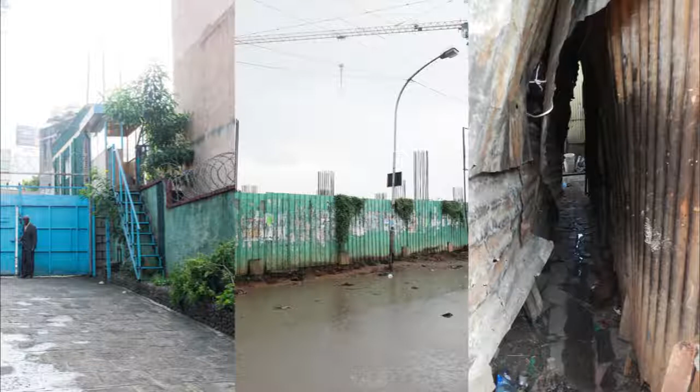people living in them. Besides more developed contexts like New York and Brussels, Merkato and Addis Ababa are part of a bigger focus on understanding developing contexts. Within Addis Ababa, the political center of Africa and a city of more than 3 million inhabitants, Merkato employs around 13,000 people in one of the largest open markets in Africa. In order to read the structures and complexities that come with this scale, clear parameters and methodologies structure the research.

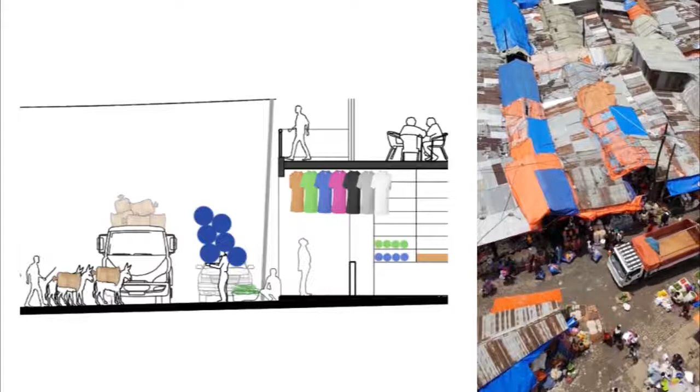The first stage of fieldwork focused on 3 major themes: motion, edges, program. The 3 themes served to pinpoint a specific situation for collectivity and defined areas within Merkato that displayed potentials and challenges. Edges. Edges were studied by means of porosity, axis, and massing. Different configurations and uses were analyzed to have an understanding of the workings of boundaries within the market.

Challenges that arose were the limitations of access that occur when shops or other activities extend their business to the street, and limiting porosity that results in newly established main corridors. Potentials include activation and appropriation of edges, which are created by a difference in configuration, typology, or floor material.

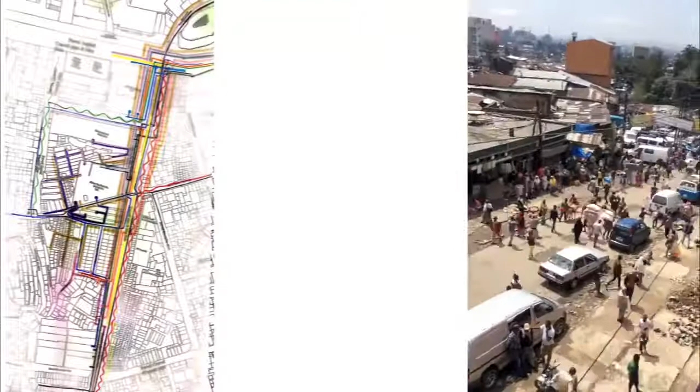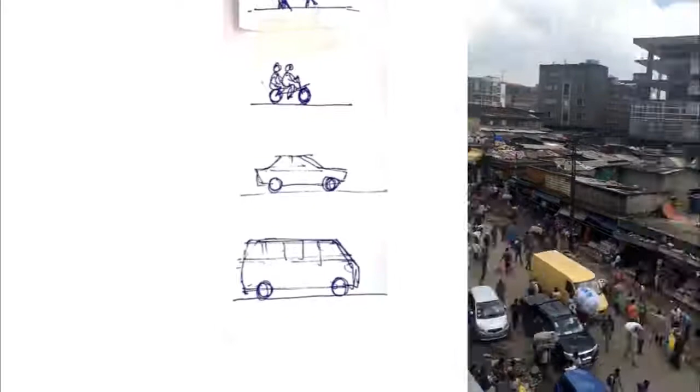Motion. Motions of all kinds were mapped to understand movements of every actor in Merkato and its impacts on architecture and infrastructure. The main challenge found here is the concentration of activities in the Minalesh Tera, where the chain of production, storage, and sales are in one place. The contrast lies within the more recent mall area nearby, where these units are decentralized. A potential is translating horizontal activities, such as the production chain, to a vertical typology, such as the nearby mall.

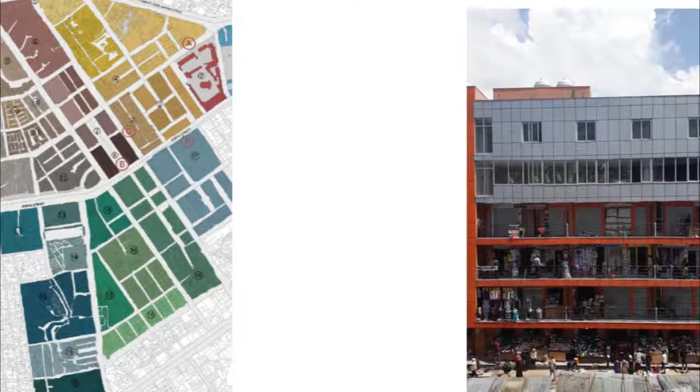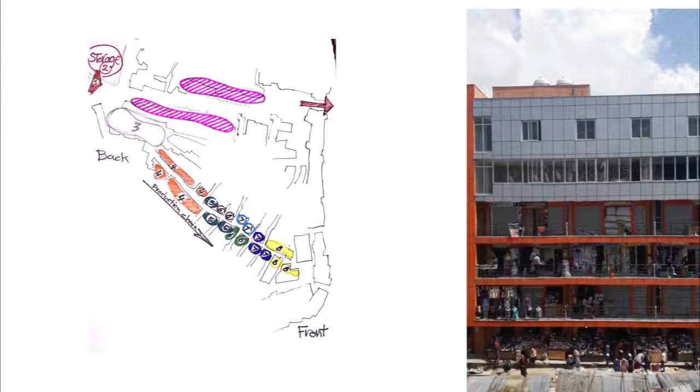Program. Goods sold in Merkato are traditionally grouped in defined terras. It still allows for intermediate spaces where programs are flexible, interchangeable, and overlapping. Malls challenge the existing fabric by disrupting groups of similar, interdependent activities within a single terra, which causes inefficient logistics and difficulties in attracting customers. Both typologies of mall and smaller scale shops show potential in the multiplicity of activities that are all interdependent.

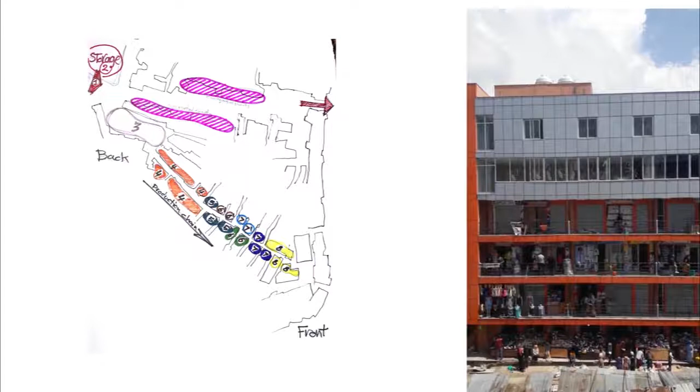The 3 themes serve to pinpoint a specific situation for collectivity and define areas within Merkato that display potentials and challenges. After reading the situation on site and identifying potentials and challenges, we started developing strategies for a sustainable development of Merkato. The strategies are divided in 6 themes: program, building, infrastructure, mobility, access, services.

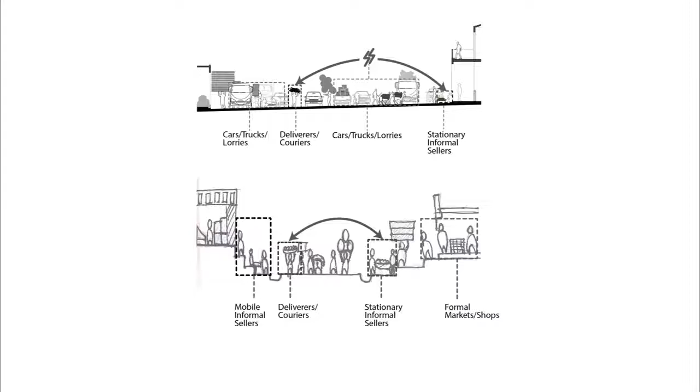Program. Within the program, everyone should be welcome. We see maintaining the presence of different actors of Merkato as a potential for the different markets on the street. A proper additional storage floor can save area on the ground floor, which can be used to expand businesses. A building could be organized around the Merkato process. The inner part could be used for production and storage, while the final products could be displayed on the most visible areas on the main street.

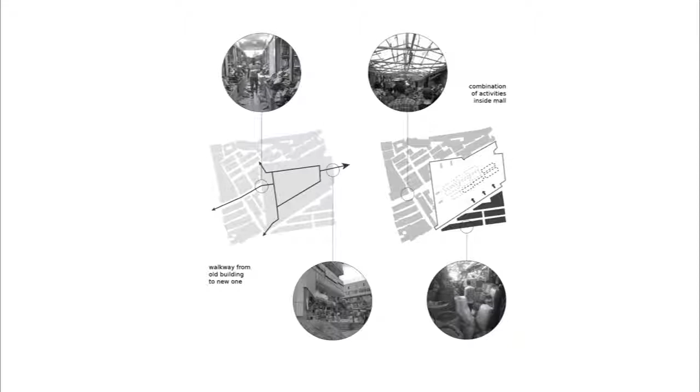A new mall and the surrounding tera can help each other. The surrounding teras can continue through the ground floor of the mall. This way, the mall can attract people to the tera. If there are different types of labor and services grouped together, keeping them close to each other increases productivity and efficiency.

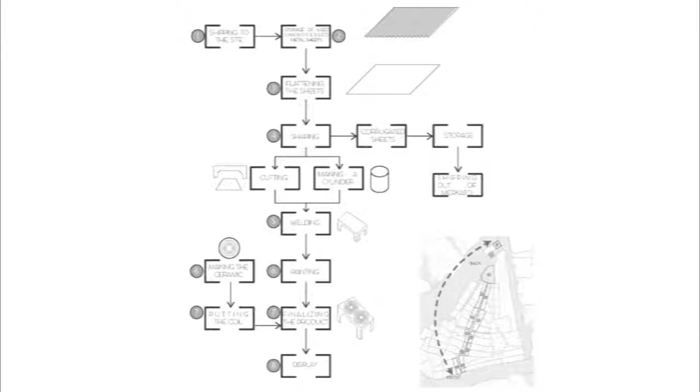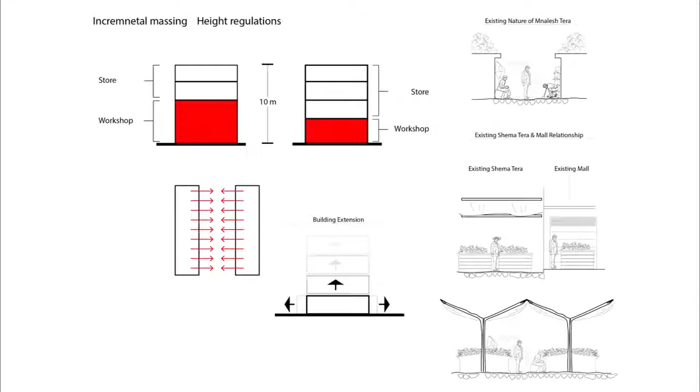Different materials, where to pave or not, placing steps and water drainage, would influence the activities taking place on the sidewalks. Building. Entrances of the mall should be placed according to the existing street so that existing streets continue into the mall. Even if malls have one front facade, the others are just as important.

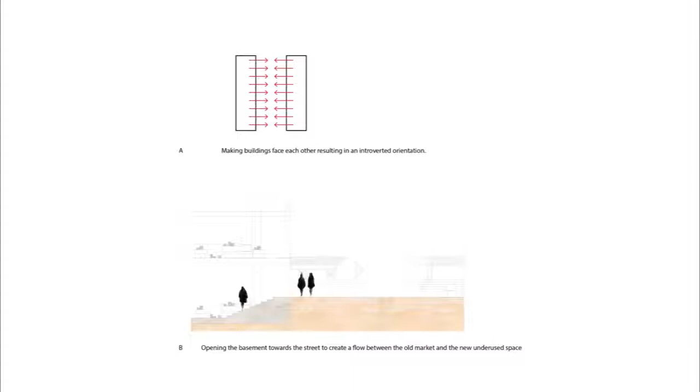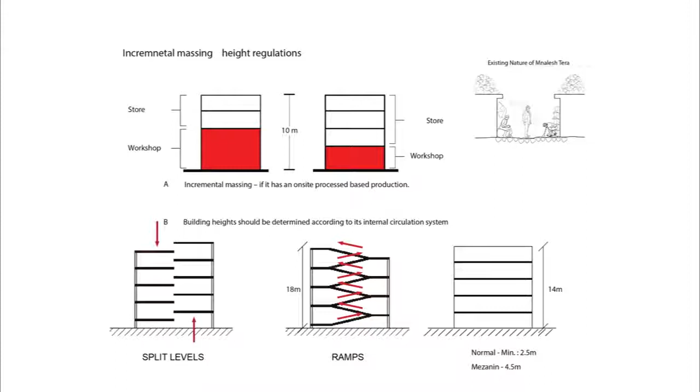Spaces between the malls can be used for informal structures, so access should be provided from all sides through the staircase and ramps. Different functions need different floor heights. Workshops, for example, need high ceilings. Split levels and ramps should be considered to improve circulation in the malls. Working spaces inside a mall or a productive tera should be accessible from a different side than the customer accesses.

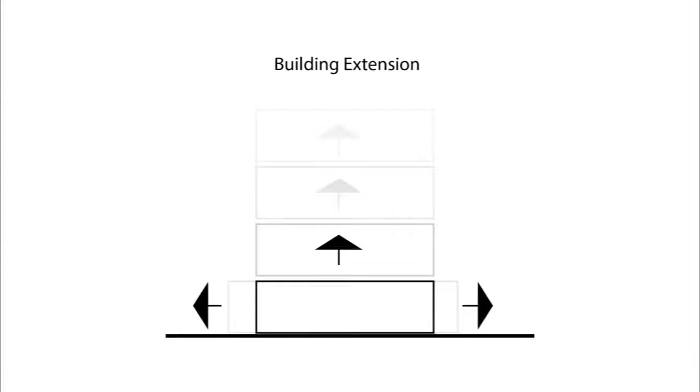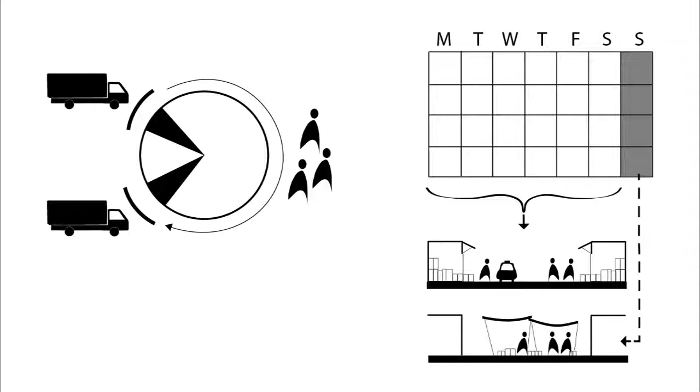A building is not going to last forever. We should consider making informal expansions possible. Access. Limiting the deliveries of goods to the shops to the early morning and evening will keep the trucks out of the streets and make movements easier during the day.

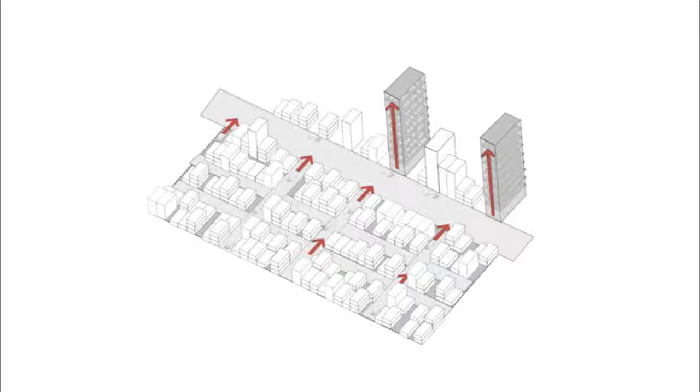To prevent congestion and provide more area for activities within the market, parking should be located in designated zones or buildings outside the market area. Loading and unloading areas for goods and drop-off zones for public transport should be specified. Shops do not finish at the entrance. A better connection between the internal and external spaces would lead to increased access and usage.

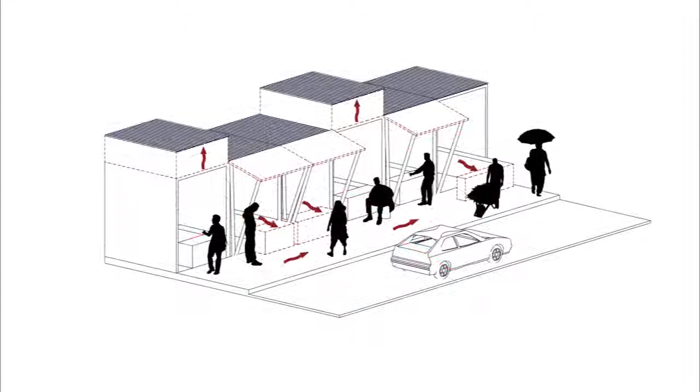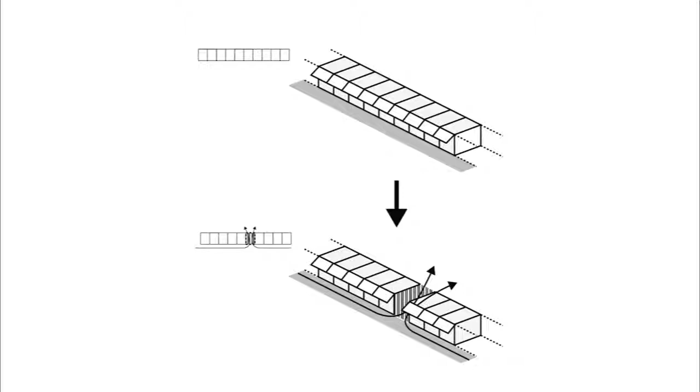The streets can be designed to allow for shops to extend outwards as long as they do not limit the circulation too much. Gaps will improve access and visibility for shops that are not located on the street. Connecting the malls with bridges will improve connectivity and reduce the need for vertical movement.

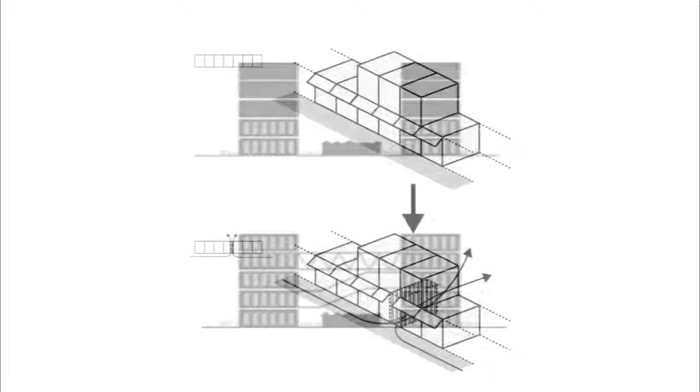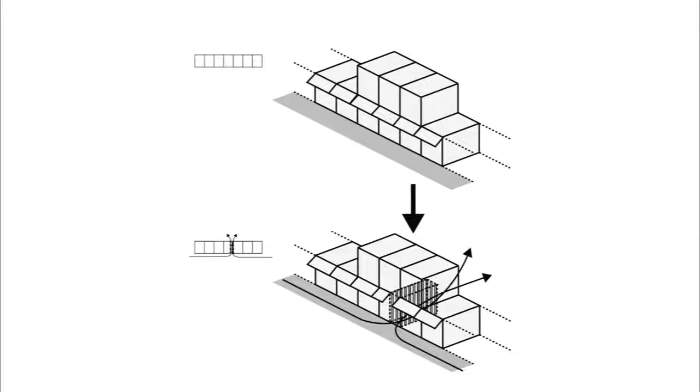Instead of building back-to-back shops, creating a joint shop could eliminate the wasted space between buildings and make the transportation of goods and movement of customers easier. Some areas could be separated from the public space of the street, creating dedicated zones for loading and unloading of goods.

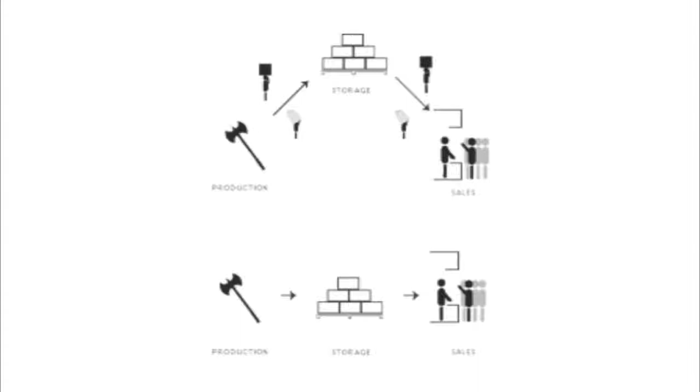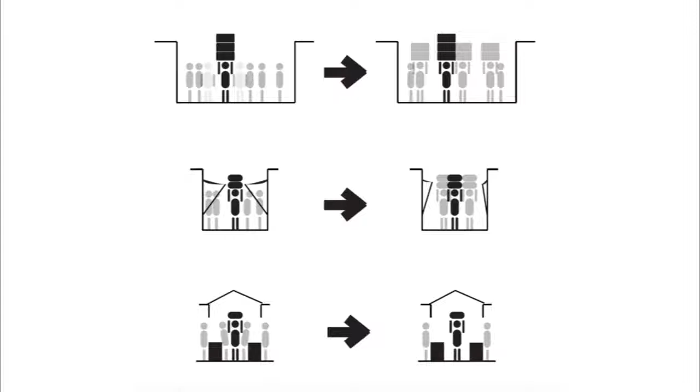Mobility. Motor vehicles should only access the wider main roads. Placing production, sales, and storage closer to each other would reduce the need for transportation within the market. Lots of openings at the ground floor would make it possible to easily move through the market. Restricting deliveries to early mornings and late evenings would make it faster and the streets will be less crowded during the day.

Services. Public toilets and wash basins on the ground can generate revenue by renting them out to an agency that maintains them and collects money from the users. A community can collect funds and build toilets and showers, which can be kept open to the public for pay and used to generate profit and maintain the facility.

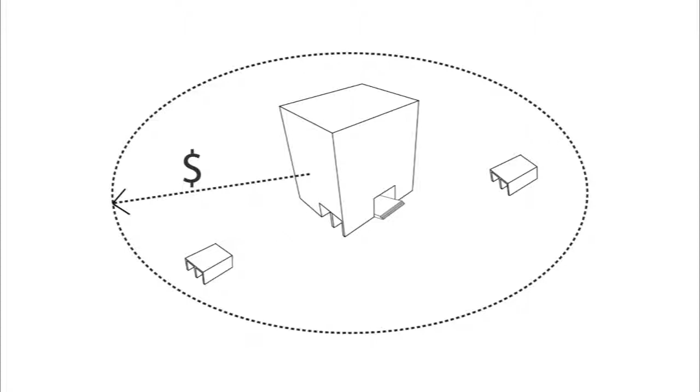Renting out the lift to an agency to maintain and collect money from the users can generate a profit. A fixed percentage of the revenue generated by the land lease for a new mall should be used by the public authorities to maintain and introduce public facilities in an area within 500 meters from the new building.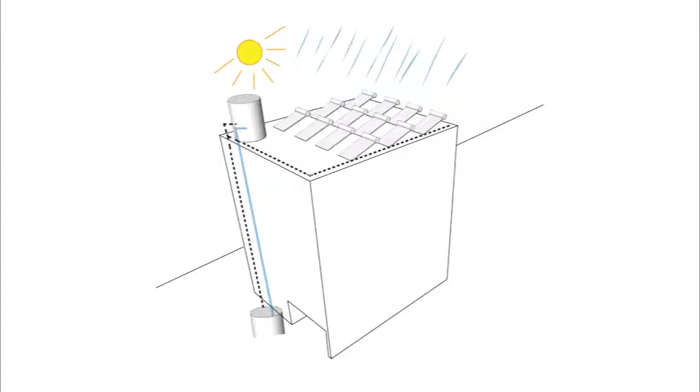Infrastructure. Solar panels can be installed on the uppermost level of a mall to generate electricity for consumption. Excess power can be shared with the grid and generate revenue. Merkato has a great potential to use gravity to collect rainwater from the streets and open spaces. The drawing shows the higher and lower points around Minalesh Tera. The highlighted location can become a collection pit and the space around it can be developed into a green area.

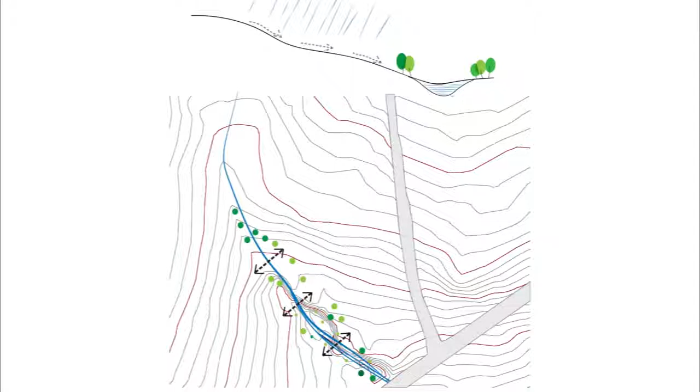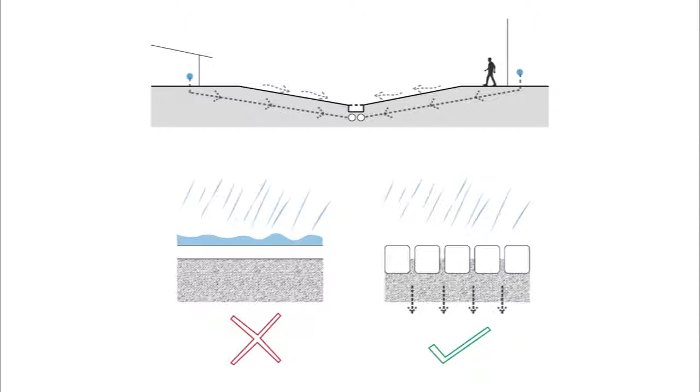The streets should be preferably paved with stones instead of asphalt. This will allow some rainwater to flow into the ground and reduce risk of flooding. The simple placement of a drainage channel into the road section will reduce the need for expensive infrastructure works. With these strategies, EIABC and KU Leuven hope to, in collaboration with the stakeholders, work towards a sustainable development of Merkato.